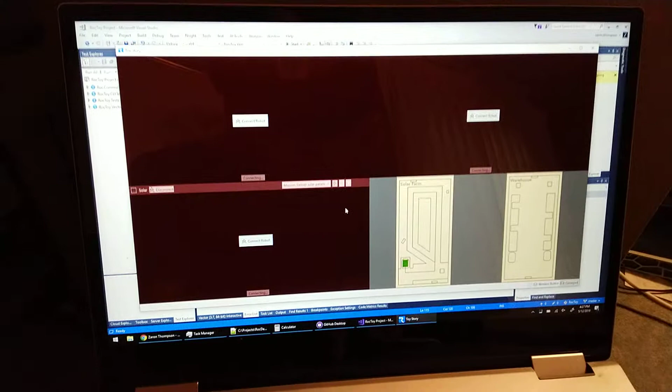So when you run this thing and you have it all set up, it'll automatically connect. I only have one robot arm right now, so it connected to the one, and when it does, it shows where it is on the map. Basically these are your peripherals down here, what's connected.

So we want to get a wireless button connected, the gamepad controller. Hold that to turn it on, and when it connects... let me pause this until it connects. Okay, it connected. So when it connects, you get this little green button down here showing that it's connected.

And sometimes it times out, and if you haven't used the controller in a while, you just got to turn it back on again. It's smart enough to know if the robot's running, and if it times out, you can still just turn on your controller and wait for it to connect, and it'll start working again. You don't have to stop the robot or restart the program or anything.

If you want to know what the buttons do, you can click on the button, or click on that gamepad button, and get a little visual of how to move the robot around. The important thing to know is that this button right here enables or disables remote control of it, basically.

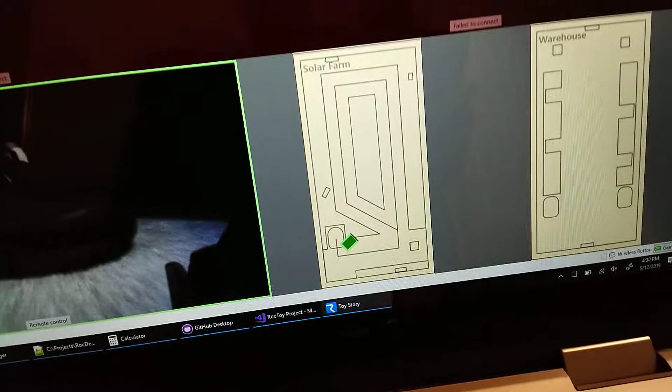So when I push it, it puts the green border around this and highlights the robot that is the one you can now drive around. So I can drive him around, and you can see on the map he updates, and on the camera it updates too.

There's a bunch of buttons that let you test things, but more importantly, if you need to switch robots, if I had multiple robots, I'd click these top buttons to rotate through the different robots to control. That's helpful to know, and it'll remember what robot you were last on.

So if you're on this bottom robot, when you push this button to untake control, it turns off, and when you turn it back on again, it'll pick up on that last robot. So you can put it on your trouble robot, and always know when you turn on your remote, it will connect to that trouble robot.

The other thing to know that's useful is that you can get something playing like this. I'm gonna say drive in a square, test square.

You can see him drive around, he's going in a square, but then I can take control of him like that. And now I can control him. So if this is a demo scenario, maybe he's bumping into something or slightly off course, and you don't want to pick him up and move him.

I'll show you why in a moment. But you just want to adjust him a little bit. You can take control of him, readjust him a little bit, whatever you need to do, and then untake control of him. Then he'll continue on playing the rest of that program exactly where he left off. So that's a good way to do it.

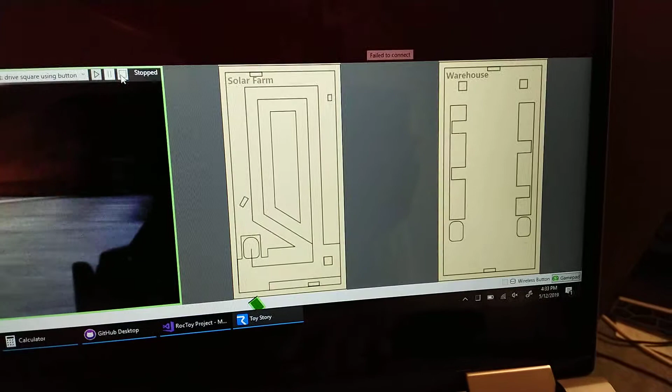The reason to do that is, let's say here he is on the map. What happens is normally the localization isn't perfect. So if I come over here and tell him to dock to his charger, now he's going to go and get back on his charger. And you're going to see on the map that he doesn't quite line back up where he left off.

So he's turning around right now and he's backing up. There he goes, and he's back in the right spot, right? But on the map, he's a little bit off. What happens is he'll relocalize.

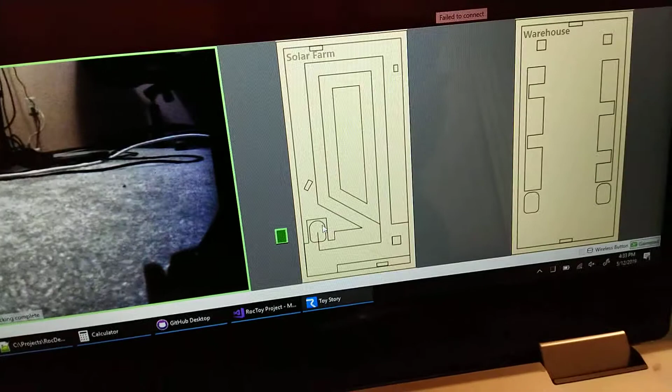Now that time it didn't work, but usually what happens is he'll relocalize to this location and reset his position, basically. So that's kind of still a work in progress, but also, if you were to pick him up, let's say he was running around, let's get him going. That's a technique he does by himself to try and get his map to realign with what he's actually doing, because things kind of get off after a while.

The other thing to see is that if he was driving a course, let's run this one going in a square again.

If he was driving a course and I were to pick him up, now I'm going to go pick him up, but I want you to see what it looks like on the map as I do that. So I picked him up. You can see that he returns back to his starting position.

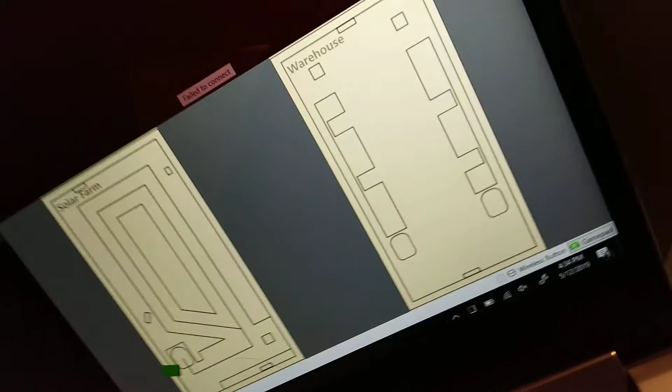At that point, you pretty much need to put him back on his charger. So I put him back on his charger. Oh wait, he's going crazy right now. There he goes. So you basically put him back on his charger, and you have stopped the program, and you've got to restart from the beginning.

So if you were to solve a problem, he's running around and he's halfway through the circuit and he's having trouble, you might just pick him up. Then you basically have to restart the whole program and start him back on his charger. So in those situations, if he's just slightly off course, you want to just take control and readjust that course slightly, and then remove that remote control.

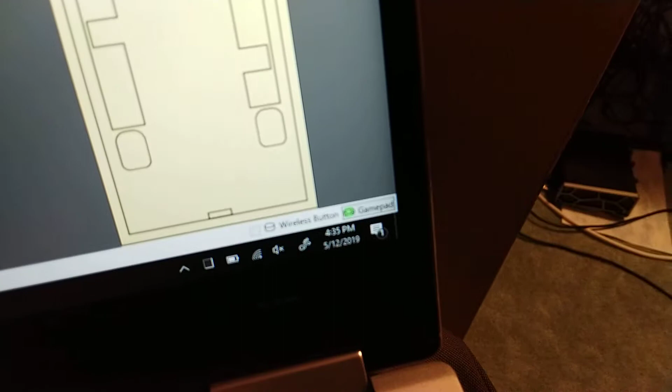That's a good technique to know. The other one to know is how this button works. I showed it last video shortly, but I'm going to show you a little more detail. So these also fall asleep after about 10 minutes of not being used.

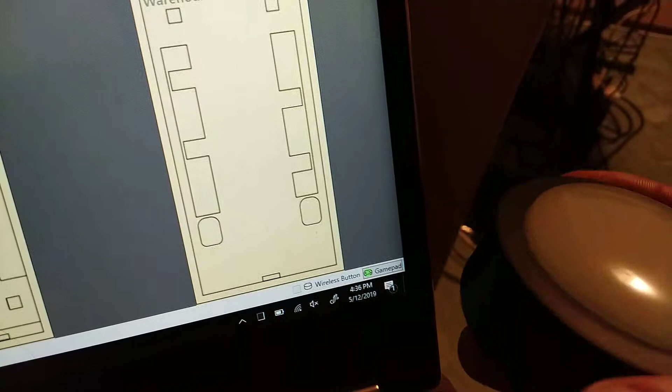And the first time you push the button, it'll do this long blue flash. You can see on here, it's not quite recognized that it's connected yet. Now that's kind of normal. It can take up to about 30 seconds or so that first time it does it. However, it will be recognized as a button push basically that first time.

In this scenario, it's still not too happy. Let's see, one sec. Let me restart this so it works here. I was just debugging this. Okay, restarting.

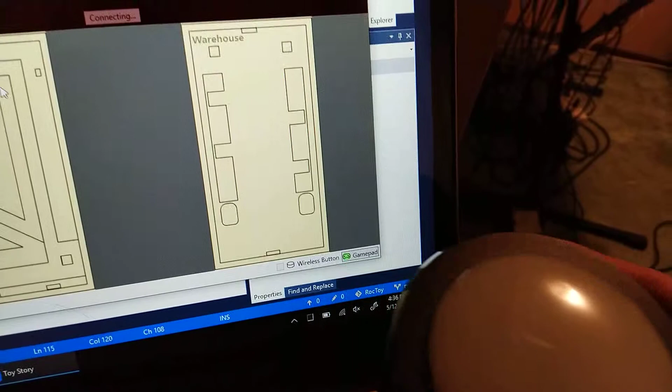Alright, so I push that button. It kind of needs that the first time to then connect and recognize it and everything like that. There it goes, so now it picked it up. So it stays blue on here. That's just indicating that it has activated itself, but it'll work at that point basically. So now when I press it in the future, when you hold it down, it's blue, so you can kind of test it, make sure it's working.

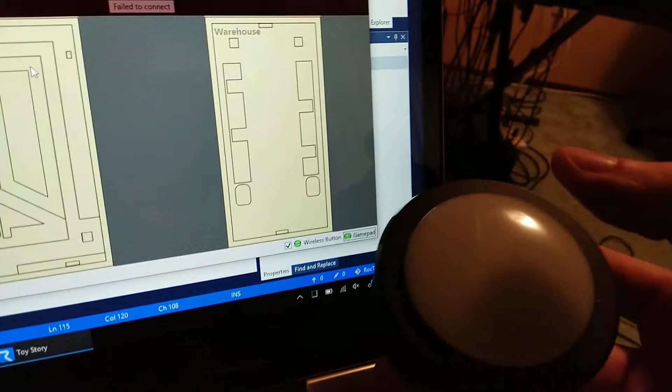And then I'm going to simulate it falling asleep again by taking out the batteries and putting them back in. One sec. Okay, so I reset the batteries. So I'm going to press it again. You can see that long flash of blue. And then when we watch here, eventually it should pick itself up and recognize that it reconnected.

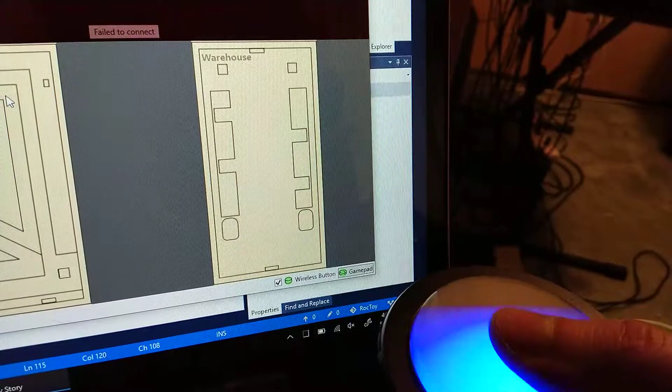So it's not perfect, but that's kind of how these buttons work. It's just good to know as you're working with it that that's how it's functioning. Come on, should have shown up by now. Well, it's not happy, huh? Well, something to test, it has been working pretty well for me. Anyway, if it becomes an issue, you can always uncheck that and disable it, or never activate it in the first place.

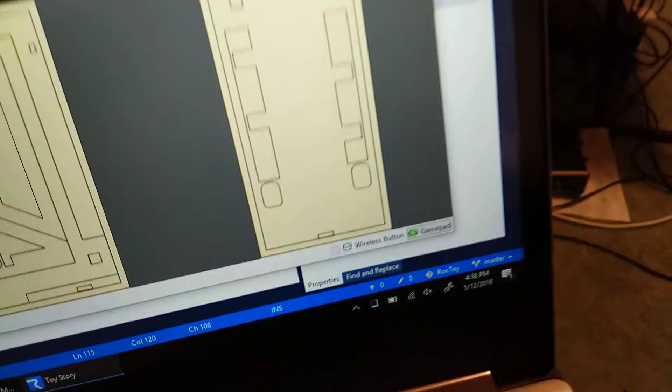When you start the application, I'm going to just quit the application and restart it. When you restart the application, it starts out grayed out, so it's not checked. So basically until you push that button, it won't go through the process of activating itself. So yeah, you can use it or not, but that's some troubleshooting tips, and some tips for how to correct the robot position without having to restart everything. Of course, the simplest thing is you can always grab the robot.

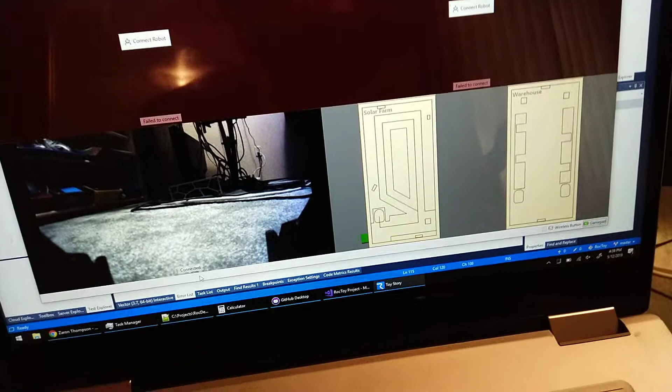Usually, here I'll show you this too. If you, let's say I were to, yeah, I'll just run this in a square again. So if I were to just grab this robot and flip him up, then he stops usually, and he just resets, and then you can just put him on his charger.

I actually didn't do it that time. Oh, there he goes, yeah. So you can always just grab him and then you kind of flip him upside down and he resets, and you can put him back on his charger, and then restart your program. Otherwise, you can pause it with the controller, readjust his course a little bit, and then unpause him and have him keep going basically. Okay, hope that helps.